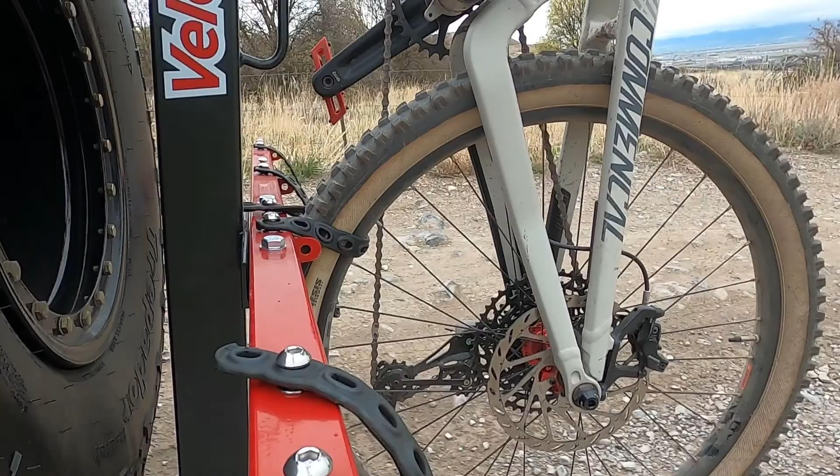We chose the 5-place 5X bike rack. The X in 5X spaces out the bikes nicely to keep the pedals and handlebars from hitting. Velocirax makes 3 to 7-place hitch mount racks. We wanted a rack that would last us the rest of our lives. The Velocirax looked simple and solid, but they're not cheap.

They are a newer company and not yet sold in stores. We had to wait 2 months after ordering the rack to pick it up at a private residence about a 2-hour drive from our northern Utah home. We're going to have another video showing the use of the rack and our opinions after using it for a while. This video is our experience installing the rack.

Alright guys, so I just got back from Alpine, Utah, where I picked up a new Velocirax. Been waiting for this thing for about 2 months. I had to order it and then wait. Anyway, I'm pretty excited to check this thing out. They come in several different configurations as far as how many bikes they hold. I got the 5 bike, so let's put that together and see what you think.

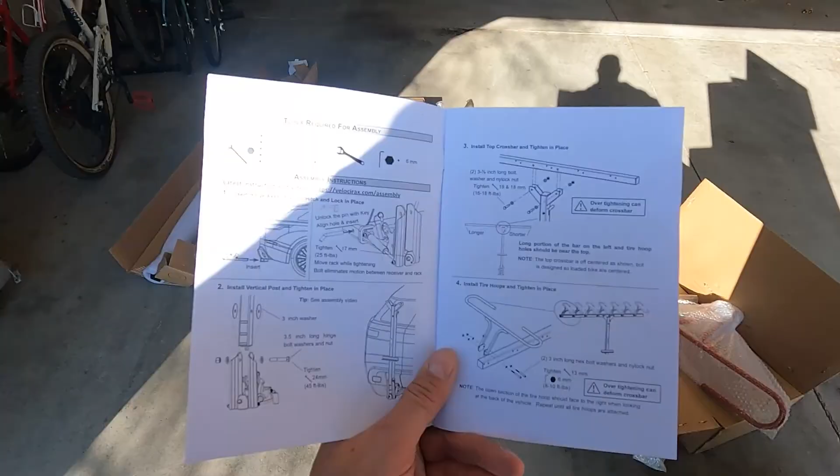It comes with these instructions I've been checking out. Seems to be pretty clear. Shows you exactly what you need to put together and in what order.

Alright, I'm going to put this piece in here. This is just the receiver hitch. Notice the wedge that will tighten up a little bit later so it doesn't rattle while it's in there. There's some pins that hook on here. I almost wanted to use those to put this thing together, but that's not how it goes. So just make sure that the bolt and that wedge are backed off. The bolt to tighten it is going to be right here. Make sure it's backed off, then slide it in.

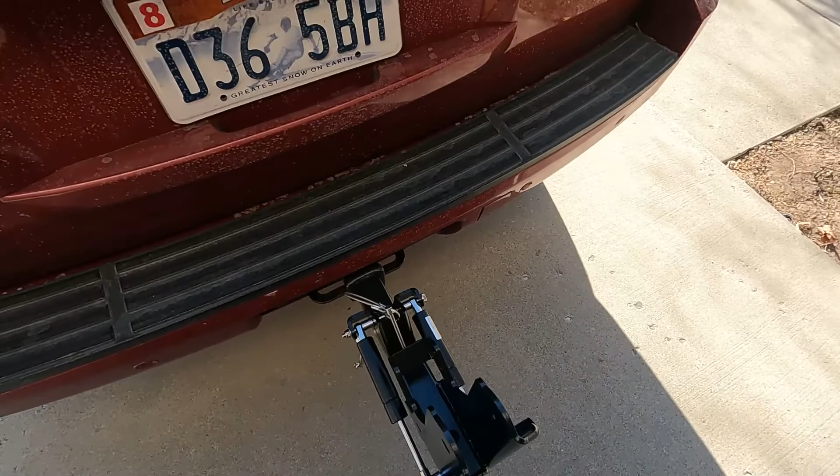Then you're going to see this is the pin that comes with it, as well as some keys that you get with it to be able to lock that. And then I'm just going to go ahead and grab these big nylon washers and the bolt to hold the upright in.

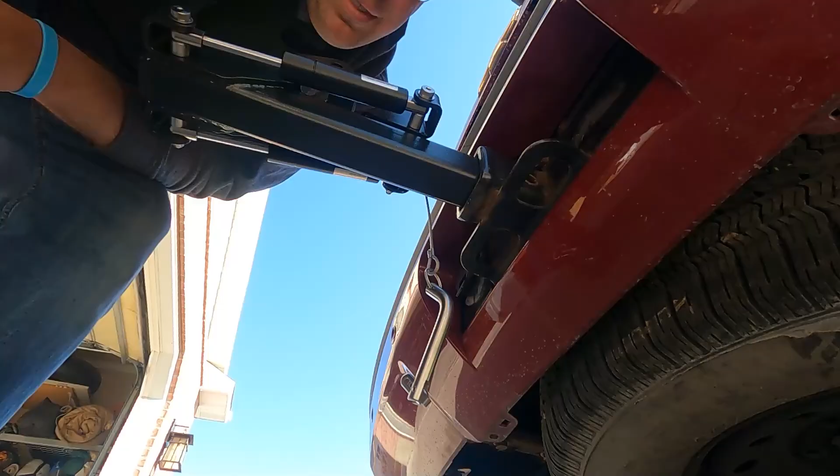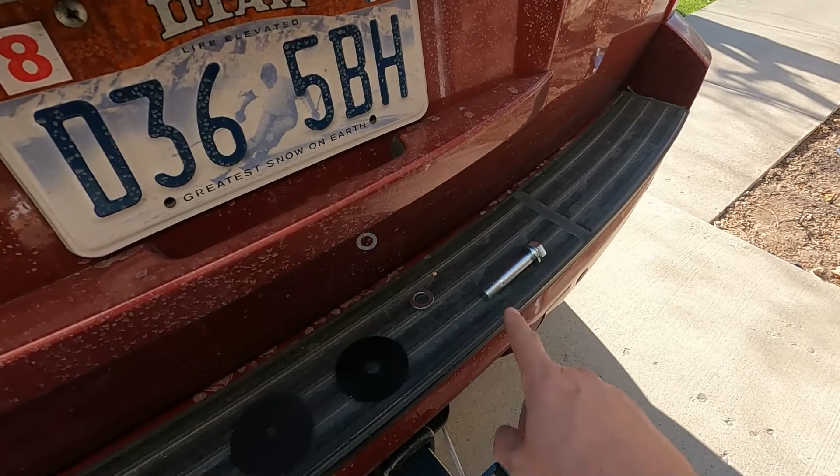Pretty slick. I'm going to throw this upright on, it goes right in here. It's going to be a little awkward by myself. I'd really hate for it to tip over and knock out my back windshield. So I'm kind of laying out my bolt, washer for this other side over here, and these washers. I think I have a pretty good idea how I can slide it together. Pretty slick, so we'll give it a shot.

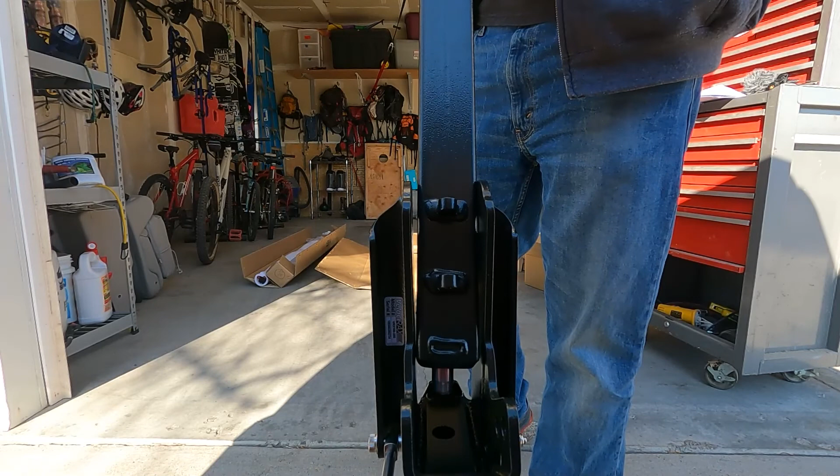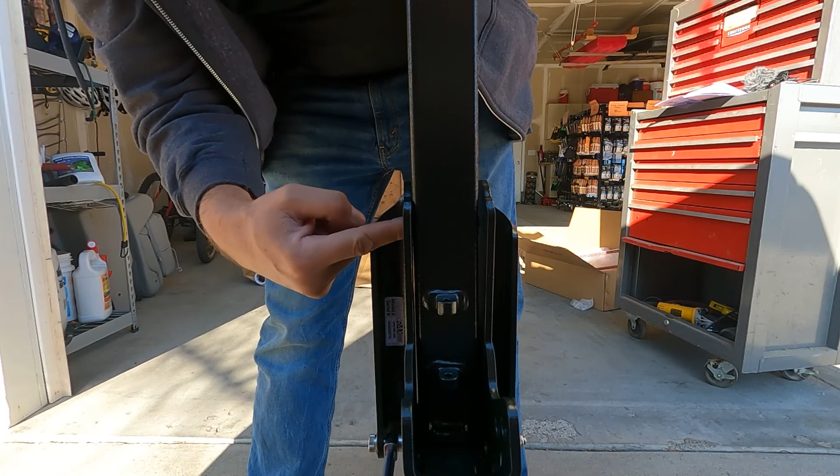You feel there's a little pin underneath this. Let me see if I can tip this and show you. So there's a little pin, and that pin's going to fit in a hole down here. So I can tell that if I fit this right in here, I just make sure it drops into that hole, and then this hole actually lines up perfectly for the bolt.

I got to make sure that I get these big old washers in here, so I'm just going to slide those down from the top, kind of hold them so they line up. This could be kind of awkward, but I don't think it's going to be too bad. Not too bad. Same thing on this side. Hole's already close on this side. I'm going to get—I don't have the bolt all the way through. I'm just going to let it slide down in. Put that bolt through, make sure I got a washer.

This is a 24 millimeter, I believe, bolt. Bolt and nut, torque down to 45 foot-pounds.

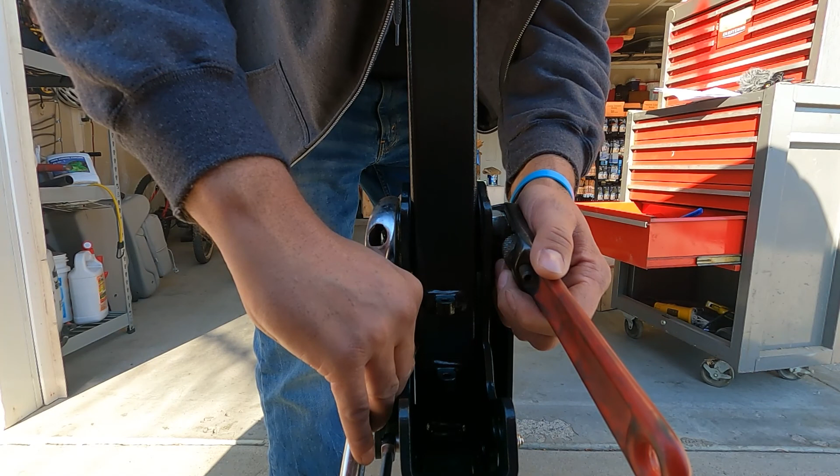Well, I don't know about you, but 24 millimeters is pretty freaking big, so I don't have that many millimeters in my collection. I do have a 22 millimeter deep wall impact socket, but I'm going to need a little more. So I got this big freaking crescent wrench, and then this adjustable wrench over here, and we're going to make it work just fine.

No sockets to torque this down perfectly, but what do you do? This is a nylon nut, so it's going to hold on there pretty well. You just want this snug so it doesn't rattle back and forth, but it's got to pivot up and down, so don't get it too tight.

We literally picked up this rack from the owner's house. It's cool to see some products made here in Utah. I like to buy local stuff.

It's pretty neat. One of the problems he said they're having isn't necessarily with this nut and bolt, but the other ones up higher — people are just torquing them down too hard. So you don't want to get too crazy. Anyway, I think we got it there. We'll see how that works.

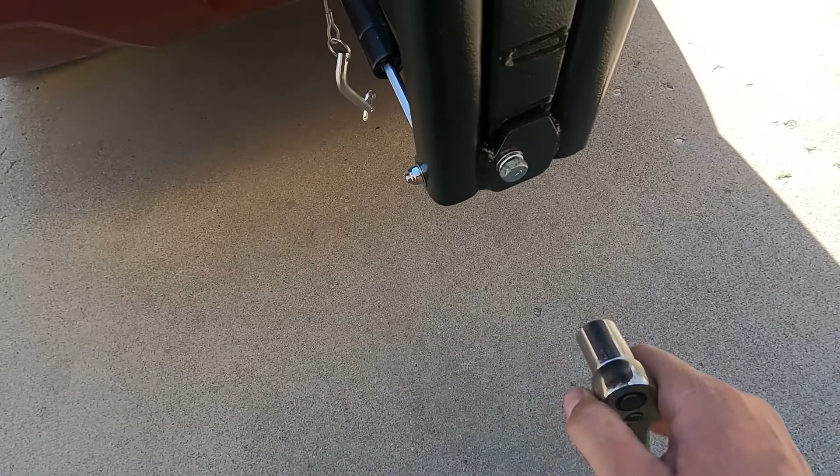This is the part that adjusts the wedge that keeps it from rattling. You're supposed to move this hitch up and down as you tighten it, to make sure it fits in there real nice.

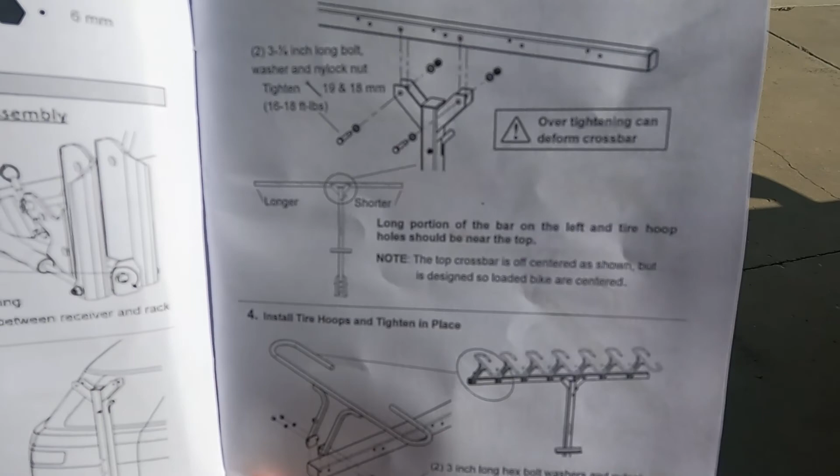25 foot-pounds, 17mm socket. All right, next part's this crossbar. As you can see, it says to put one side off — one side's shorter, one side's longer. The bolts do line up that way, so that's something you're going to want to look for.

These are 19 and 18mm — 19 on the nut side, 18 on the bolt side. This is where people are getting these too tight and bending the tube, so just get it snug. Again, it's a nylon lock nut, can't go wrong.

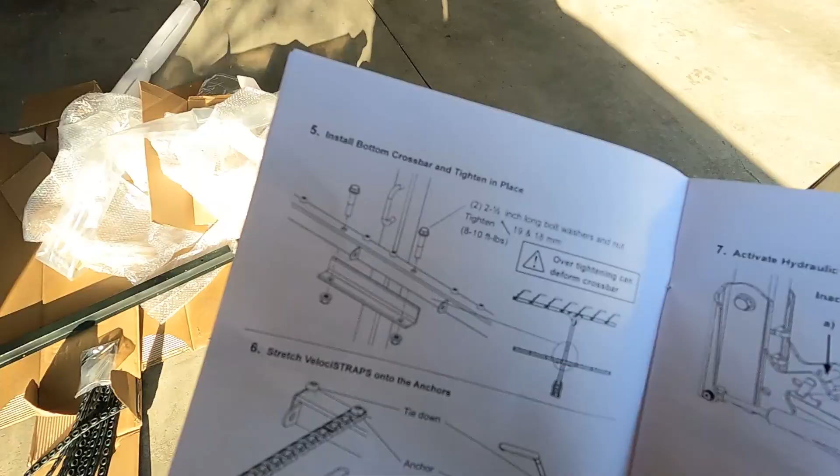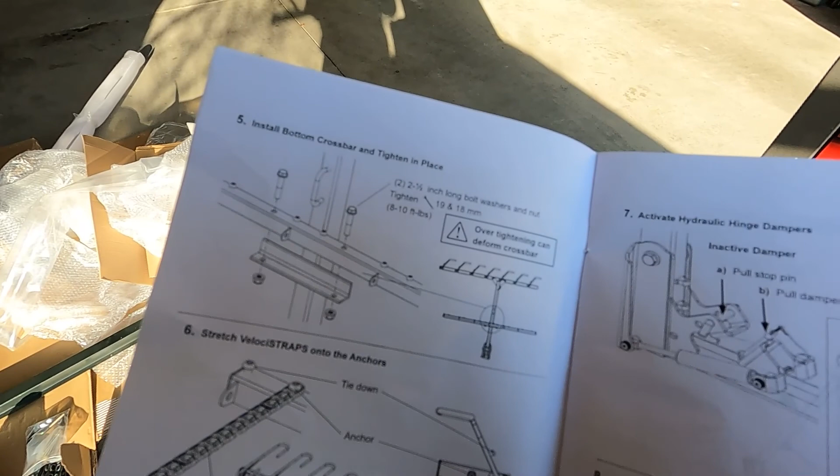Now we're going to install that bottom crossbar. Looks like we have a couple of 2.5-inch long bolts with washers and nuts, and that should be pretty easy.

This almost can't go any other direction, because you've got either this tab in the way or a couple of these studs in the way, so pretty much only one way it can go. 18mm, 19mm.

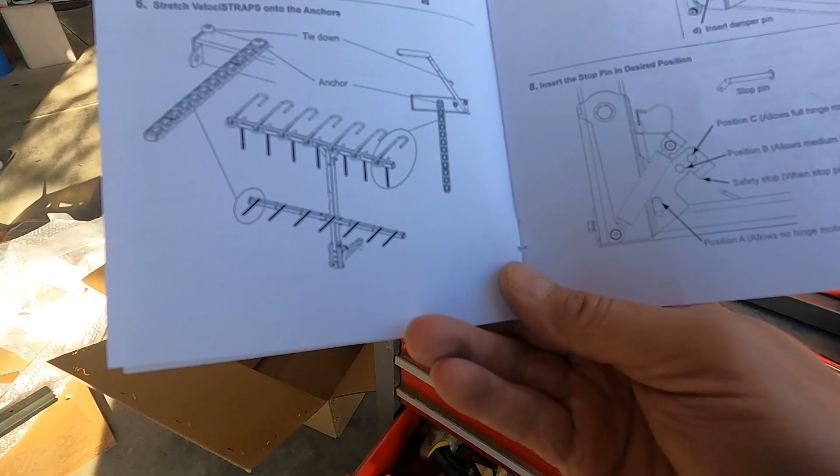Next for me is these little tie-down straps, should be 10 of them. Straps go on pretty slick. I just put them all on the same side so we can just slap them over.

These guys up here — I don't know if it would be advantageous to put them up on here and then bring them down, but we'll have to do a video about that and see how this thing works, what the best way to put stuff together is. But it looks pretty good.

I gotta set the little dealio right there. You know what I'm talking about? The dealio, the thingamabob? Right there. You gotta set that next. Pull that pin out — releases this.

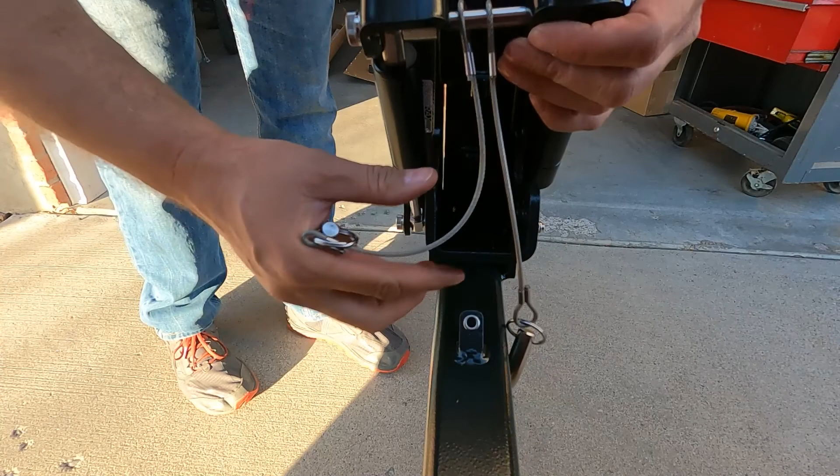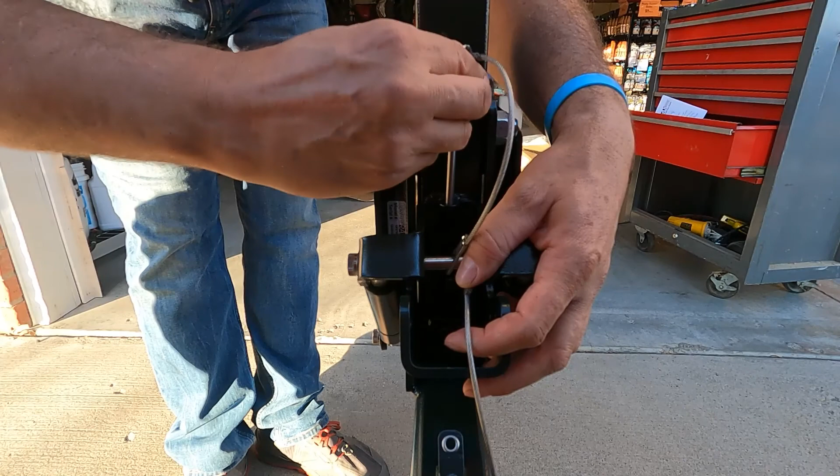Push the shocks down in, set that in there. And this, I think, is kind of a limiter, from what I understand. So let's see how that works.

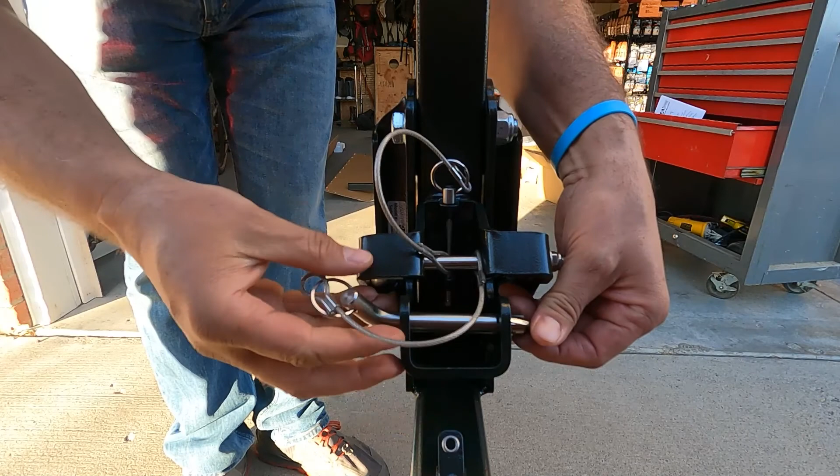All right, let's see how this works — release that, latch up top. How it works is just really hard... it's so — if you have a lot of weight on there, okay, that makes sense.

Clears. It clears. Cool.

Nice, a few leftover parts. It looks like this rail is to hang it up on the wall.

I'm going to make another video for that. We'll see what this thing looks like hanging up on the wall. Pretty excited for that too.

Overall, this was an easy rack to install. I liked that the fasteners were generic, so if they ever need to be replaced, it will be as simple as making a run to the hardware store.